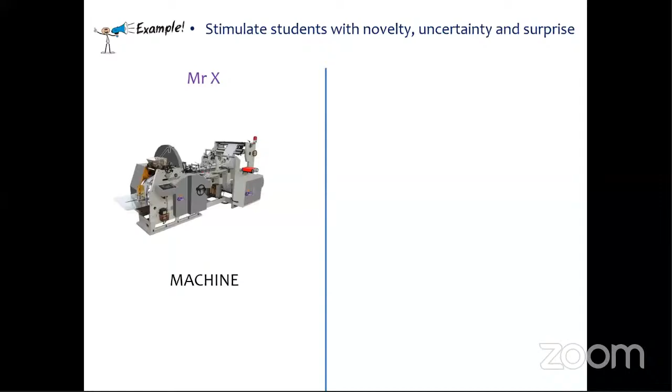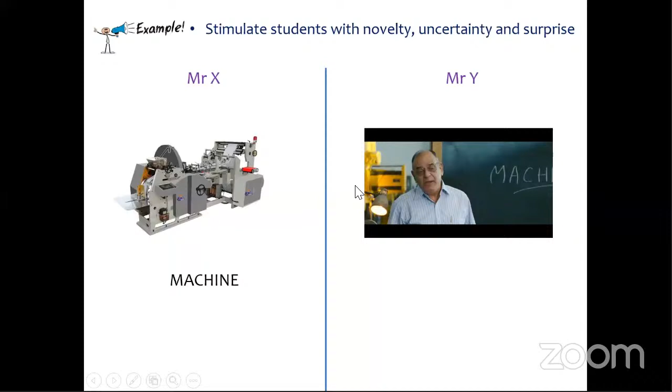But Mr. Y, who is using the events of instruction given by Gagne, what he will do is just post this picture. Now in this picture, we don't need to say that we are going to learn about machines or something like that. Immediately they will recall the movie called 3 Idiots. Most Indians have seen this movie. Then they come across that scene, and they will start imagining, okay, this is something about machines. There is one simple definition for machine, one complicated definition. All this stimulation starts in their mind, and curiosity generates within the student.

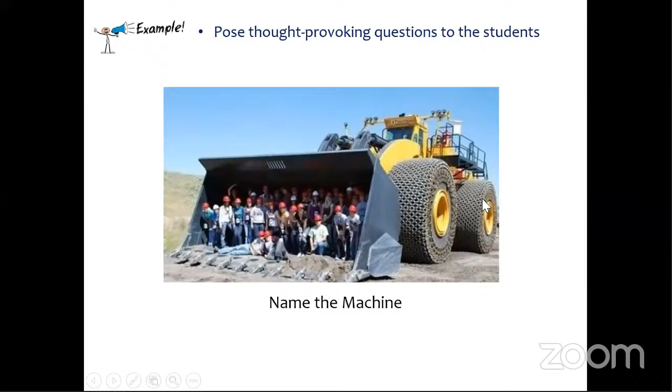So this is one example. After that, you can show them a simple picture and ask, can you name the machine? Then you tell them to start discussing with each other and try to understand what type of machine this is. In discussion, they may say it's an earth moving machine, it may be JCB, bulldozer, whatever it may be. So interaction starts within them, and they start participating in the class, and they get connected with the topic. This is the basic idea behind all these things.

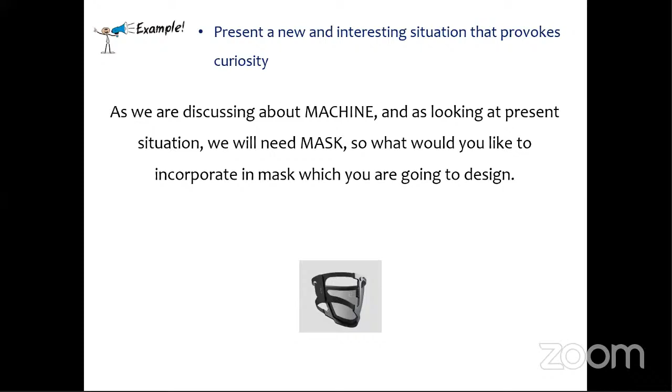Now again, just for curiosity, you can put a question like, as we are discussing about machines, and looking at the present situation, we will need a mask. So what would you like to incorporate in the mask which you are going to design? With this question, you trigger their imagination. Now, when you trigger their imagination, they will wonder what I can incorporate. It's a machine. What should I want? I want oxygen intake or something like that.

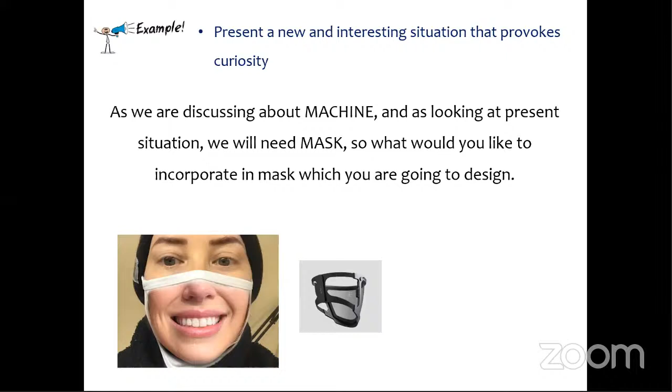Then you can give them an example like this, that you can print your own photograph, because people are not able to recognize you, so the mask should be like this. And believe it or not, in India 2 or 3 people started doing this business, and they are earning like anything. And just to create some light moment, you can put these photographs also.

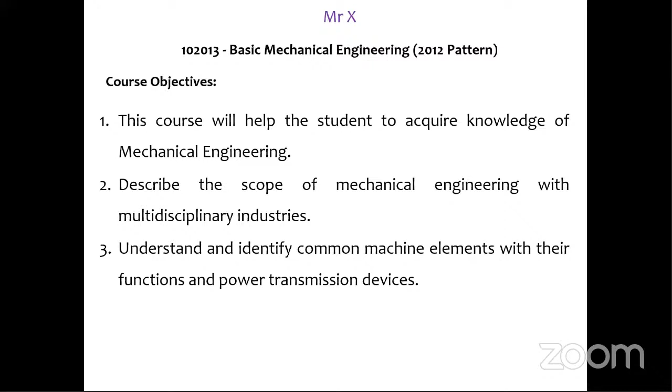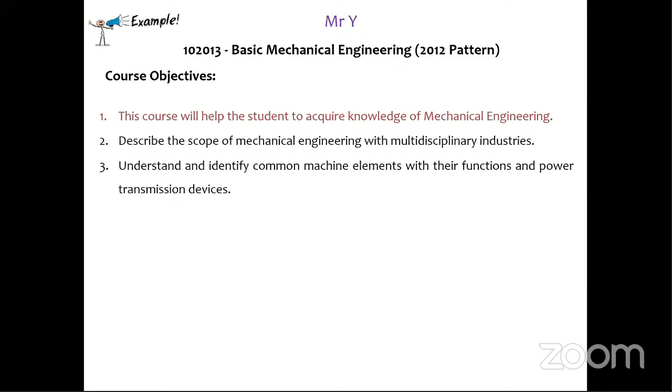Objectives are defined by the university, so this will be our basic objective. Mr. Y, who is using the 9 events of instruction, will still put those objectives because we are not in a position to change them. But I will give you an example by taking the first course objective.

This course will help the student. When we come to the students, tell them 'student means you.' So they create some curiosity: yes, somebody is talking about me. I give them some importance, that is very important. Then they get acquainted with that particular thing and start concentrating on it. The student is you, then again you can tell them what is mechanical.

It's the branch of engineering that involves design, production, and operation. So when they start thinking about the machine, it's not only about the machine or its working, it is also about design, production, and operation. Such things get stuck in their mind and they start understanding what is mechanical, what is engineering.

You believe it or not, 70% of students don't even know the definition of engineering when you ask them, even if they are in third year or final year. Engineering is the action of working artfully, doing something about it. So we just need to revise all these things every time, that is very important.

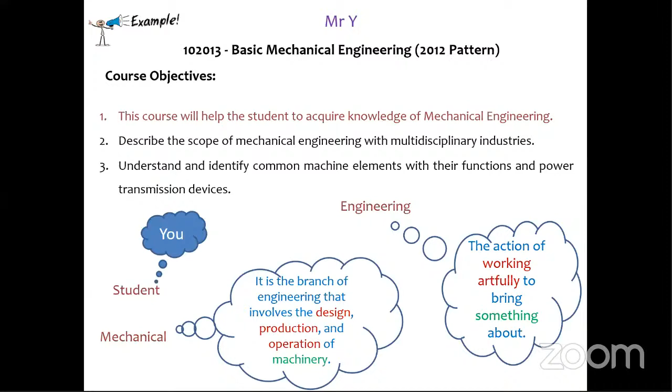You can explain to them the marking scheme, the duration, the minimum passing marks, and all. This information we need to provide them at any cost.

Then the third one is stimulating recall. Help students make sense of new information by relating it to something they already know. Most of the time we just tell them what they are supposed to do or learn. But can we attach that particular thing with whatever they already know, maybe from a prerequisite subject or a real life situation?

Ask them questions about their understanding of a previous concept. So discussion with these people is going to play a very important role. I will take one more example for that.

Mr. X will start with the simple definition of machine: a machine is a device that makes work easier by changing the size and direction of force. So what will the student do? They will start mugging up, remembering that a machine is a device that makes work easier by changing its size and something like that.

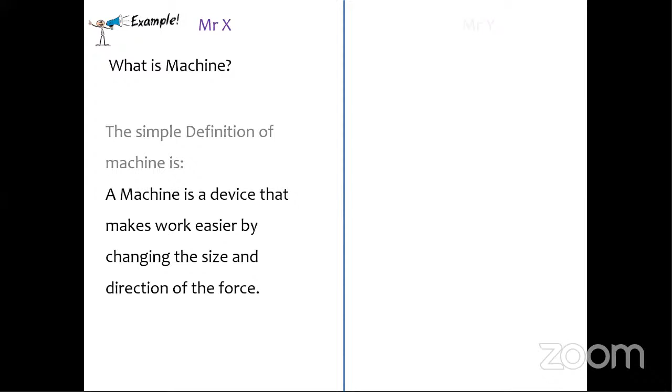But if you are following the 9 events of instruction, Mr. Y will come up with a new idea. He will just show one picture: what is a machine? Where do you see a machine in this picture? If you want to pick up this barrel to a certain height, what are you going to do if you don't have any machine? You're just going to lift it up, and the weight will be more. But the pulley which you see here is considered a machine.

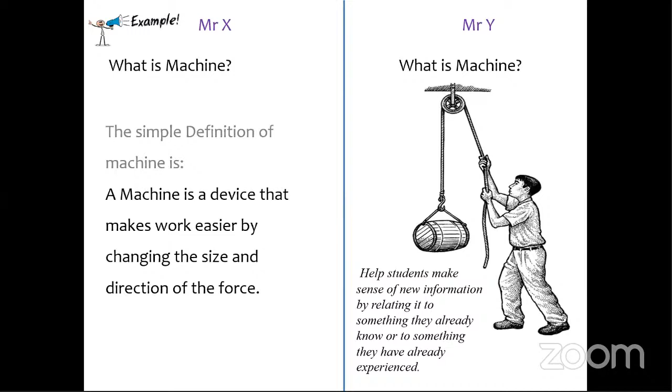And now you can see that the direction of force also changes, now he is pulling. This picture memory is a long-term memory, so he will always remember this picture and can correlate it with the definition. That indirectly makes him aware of what is exactly meant by machine. It helps the student make sense of new information by relating it to something they already know or have already experienced. That is very important.

Now point number 4 is presenting the contents. Use strategies to present or cue lesson content to provide more effective, efficient instruction. Organize and chunk content in a meaningful way, that is very important.

For that we are very fortunate, we have PPTs, we have a lot of videos we can show them, we can present and explain those things, we can even demonstrate. We can go for group work also, or use the maximum number of media resources available. That is really going to help the student understand, and help us as teachers to present the content.

I'm going to take an example, coming back to the machine, of how a machine works. A machine needs some input other than raw material. Looking at this machine, a student may say the input is electricity. But you can tell them input is nothing but a source of energy, which may be mechanical, hydraulic, natural gas, or electrical, water, chemical, steam.

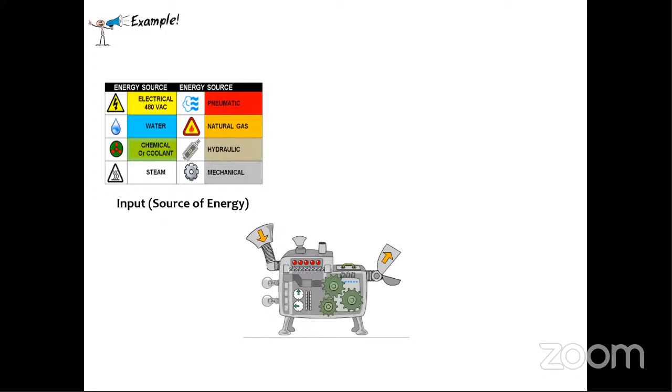So what you are doing indirectly is increasing his horizon of thought process. Now he will start thinking input is something, a source of energy, it may be anything. And output will be good.

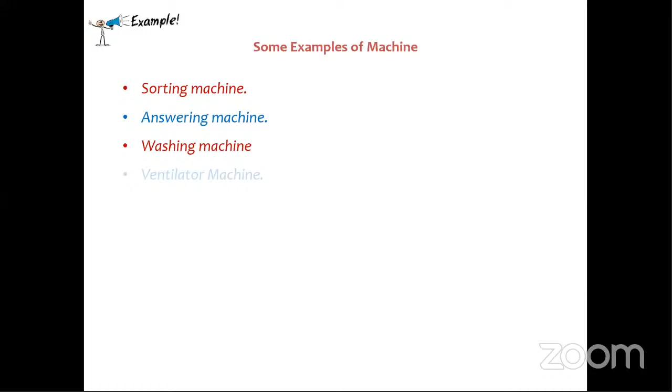Now some examples of machines. Again, Mr. X comes with the machine examples. He will say sorting machine, answering machine, washing machine, vending machine, ventilator machine, radio, TV, sewing machine, ticket machine, editing machine. All these are nothing but machines.

But can we make some change in these so the student gets more familiar and starts participating with us in the class? That's what we need to see.

Suppose I put all these machines in a different manner: different sizes of eggs are sorted by a machine, so it is nothing but a sorting machine. Ask them which type of machine they think about.

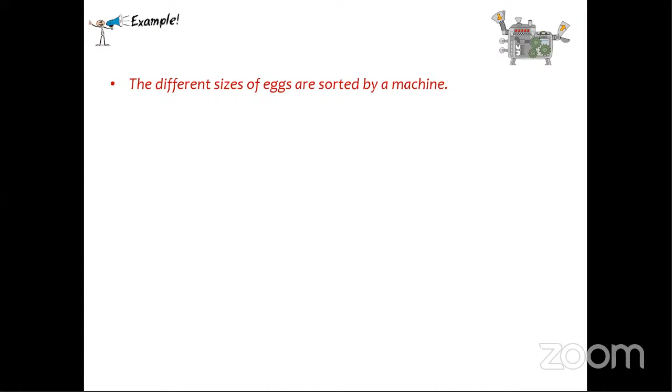If I am not at home, when you call, leave a message on the machine. So it's called an answering machine.

Don't forget to put towels in the machine before you go out - so he will immediately say washing machine. This way they start taking interest and understand what type of machine, or what are the categories of machine, or to which thing we can call a machine.

Doctor keeps him alive on a life support machine - so, ventilator. There is a vending machine on the platform that dispenses snacks.

Now here you are educating most of the students, because if you ask this vending machine question, hardly 4 or 5 students will say they know about it, since they somehow visited an airport or outside India. But in India, vending machine is still a new concept, so make them aware what a vending machine is and how it works.

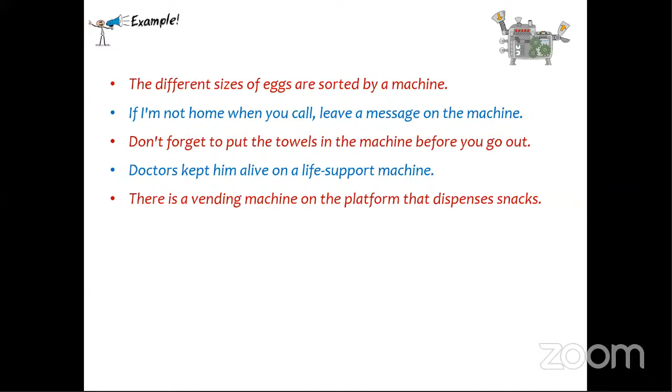When they interact with that machine, they will feel more familiar and start recalling that knowledge. That is going to play a very important role.

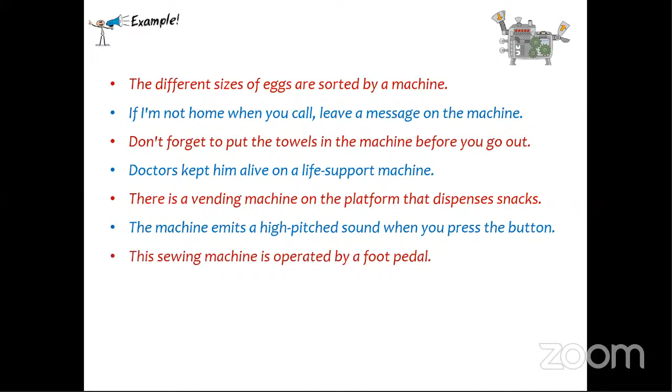When you put such things in front of them, what happens? They will start thinking on their own rather than just giving the name of the machine. Then you can show some videos, like an ice cream cone maker.

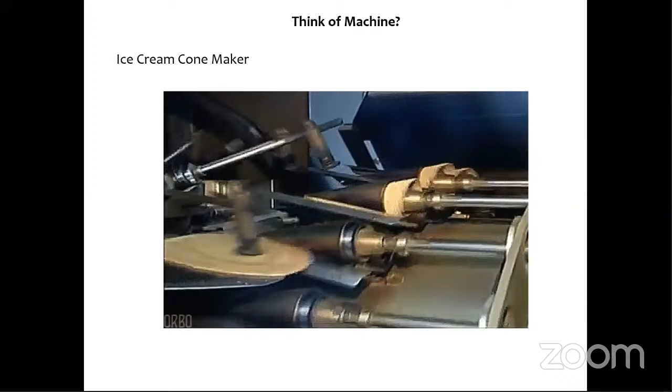They look at all these things with very large curiosity. This is an example of mass production, so you can talk about many things while showing these videos or pictures.

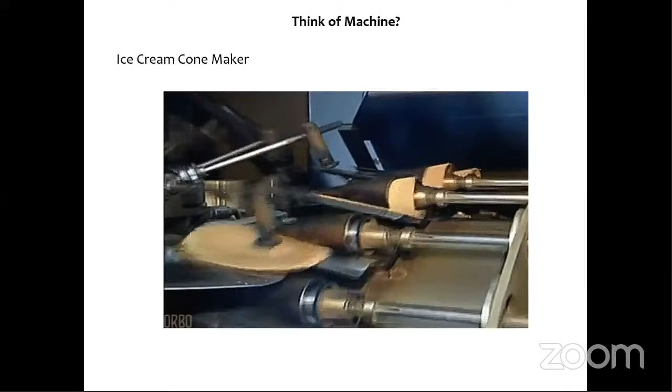It's not that the video is going on and you're just observing along with them - you need to recall something, generate new ideas, new information, or feed new information into their minds. So they will understand what mass production is and all those things.

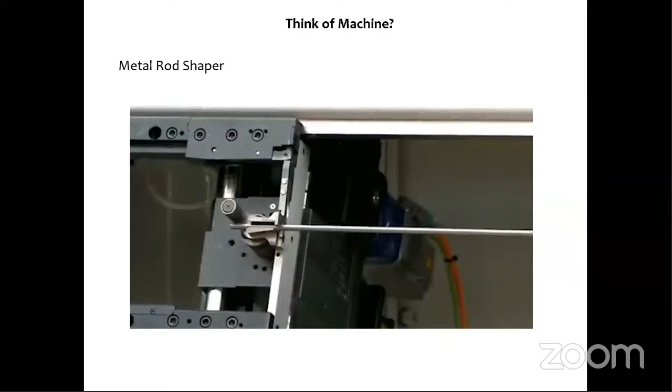Metal rod shaper - they will start thinking, okay, which material is this? It's bending automatically, what's happening? So the curiosity is generated within them - such small videos play a very important role in presenting the content.

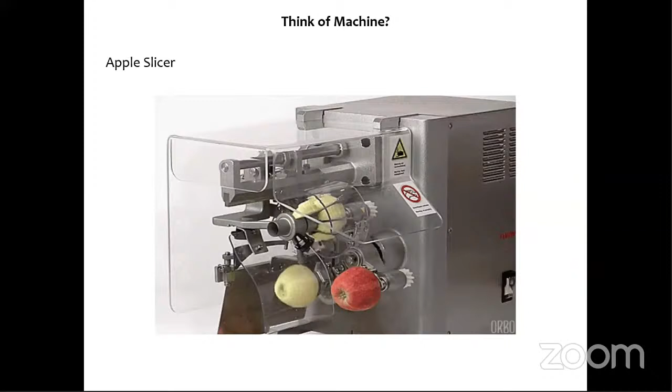Even an apple slicer - when you slice an apple at home, we use a different thing, but in industry they use a very different thing.

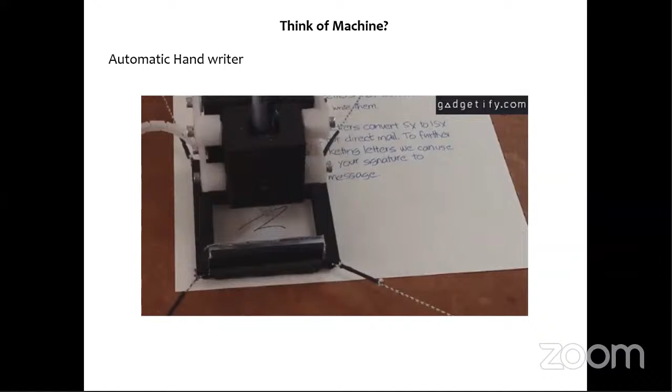Automatic handwriter - they get amazed at how you're going to use this. Try to include some funny moments in that, like, don't use this for completing your assignments or something like that. We need to create a light moment every time.

Because it is very difficult for us to keep them engaged in our lecture for 40 minutes - their brain goes out, comes in, goes out, comes in. So we need to recall them every time.

This is some innovation about machines - this is nothing but the fusion of two machines: one is a Fevistick and the other is butter.

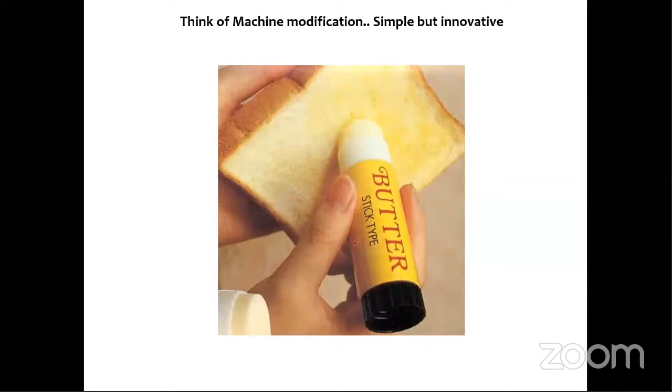It is very difficult to apply butter on bread, so what you can do is make a fusion of machines - that's how innovation starts in their mind.

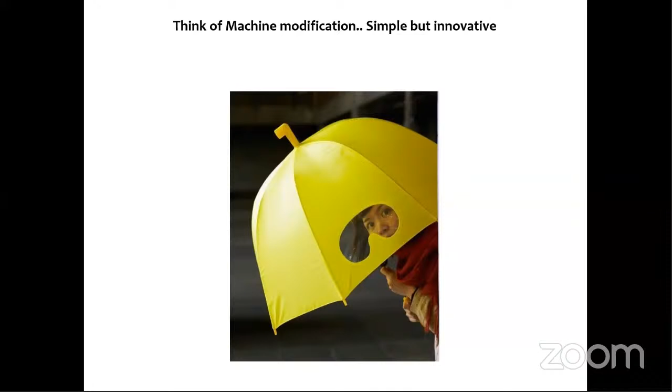Just give them a 2-3 line idea and move forward. This is also a machine - if you're health conscious, you can use a belt like this. Right now it's showing 95, tomorrow it's 100, then it's a signal for you to start exercising.

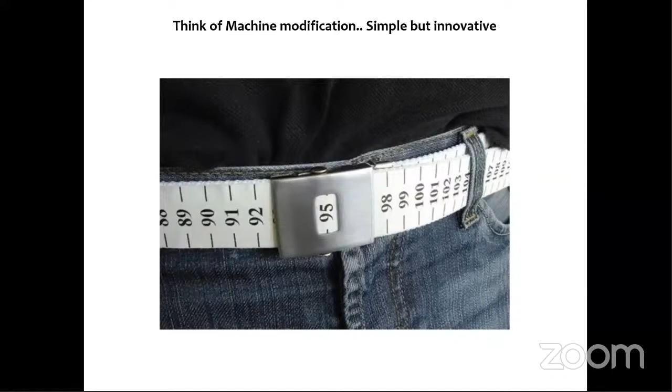Now what is this? This is a dress or wipe machine. You think, let them think - that is more important. We don't need to explain each and every thing. Their minds should be occupied with all these things, and they will start thinking about what is going on.

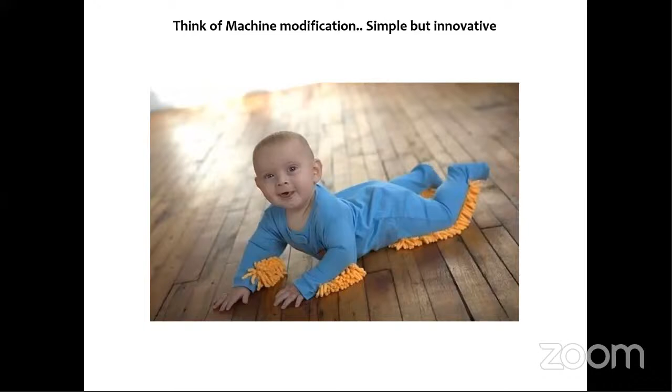Why are we calling it a machine? Is it really a machine? Then they will start asking questions and answering those questions themselves - that is more important. Fifth one is providing learning guidance.

Advise the student of strategies to aid them with learning content and of resources available - concept mapping, association, role playing - that is also important.

Case study for real world application, analogies to help knowledge construction, and graphics to make a visual association.

Take one example, let them think and imagine. That is most important. Just show them a pen and ask them, can you imagine pen is a machine, and how many parts are there? They will start discussing, saying there are 4, 5, 6, 7 parts, coming up with different numbers. Then show them this is the complexity of this machine. We see a pen as a simple machine, but there are a number of parts.

So the interest will generate. Then we discuss how we produce these parts, who produces them, what is SME, and all these things. We can discuss a lot in a single lecture and provide a lot of information to the student. That's my experience.

Then elicit performance. This is also very important. Let the student do something with their newly acquired behavior, skills, or knowledge. Provide them with practice activities to activate the learning process, because unless you give them the opportunity to demonstrate what they have learned and what they're thinking about, it won't work. So let them demonstrate through role playing, showcasing their knowledge, or a scenario or case study.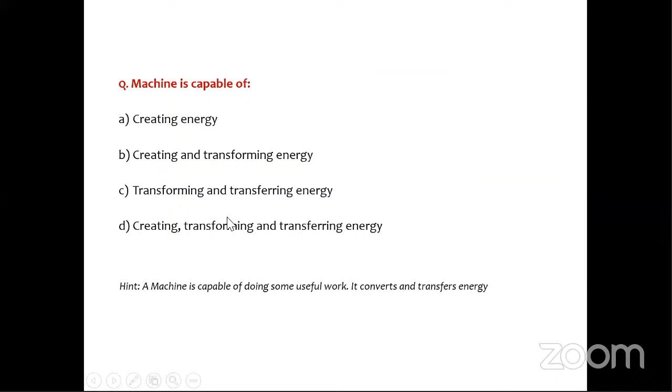Objective - never put the objective as just 'answer it at any cost.' Provide them a hint, because they are learners, they are learning.

Okay, a machine which is capable to do useful work converts and transfers energy. So they will search transforming and transferring energy. Even you can put some pictures also. They will come to know how the kinetic energy works, how energy comes in, how energy goes out, and where is the potential energy. So indirectly you are covering a number of things within a paper also.

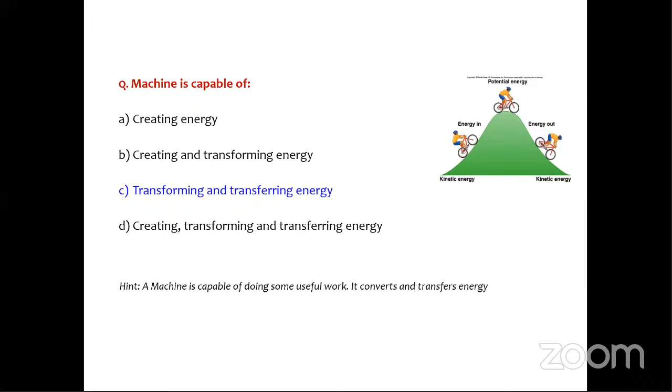Then they say, no, we never heard about all these things. Then you can tell them, this is said by Tukaram of Chitale Bandhu Mithaiwale, and what he wants to say is 'Krupaya sutte paise dya' - please bring the change, because it is not possible for us every time to bring the change. So tell them every time it is not necessary to think so seriously. Always keep your approach on a light mode. Try to learn maximum out of it and try to understand what we want to learn.

Last point - enhance retention and transfer. To help students develop, they must adopt new knowledge through exercise. Having them summarize content, generate examples, create mind maps, concept maps, create outlines, and create other types of reference material - let them do something on their own. That is very, very important.

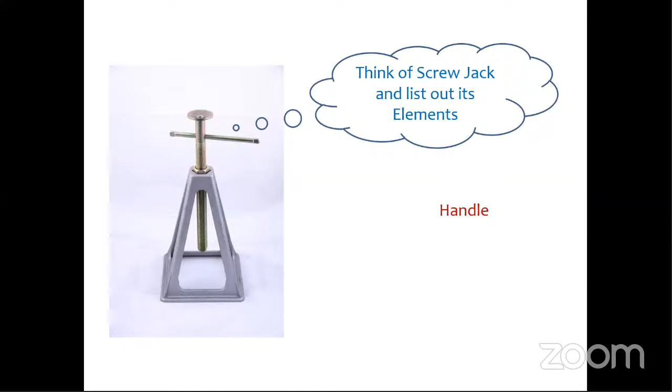Or if you want a very simple example, you can say just think of a screw jack and list out its elements. What are the different types of elements? So somebody will say handle, screw, nut, body. So you are involving them in your lecture. That is the most important thing which we need to follow.

So these are the simple things which we need to follow. If you follow this, it is not that difficult to adopt all these 9 events of instruction.